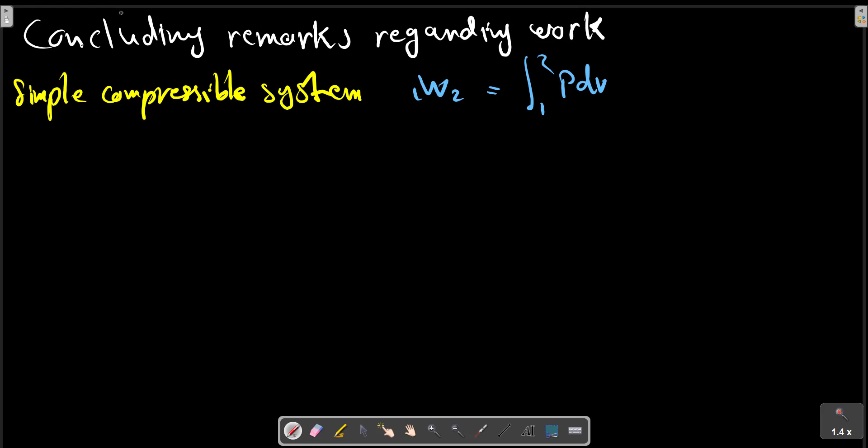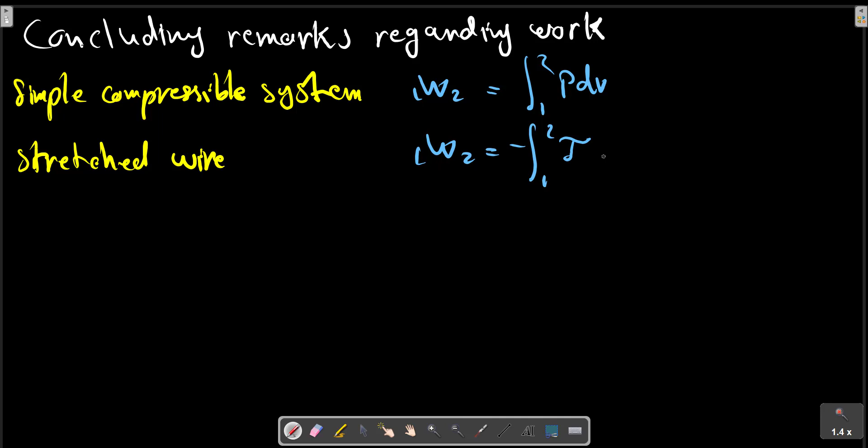Stretched wire, dL. Surface film. System in which the work is completely electrical.

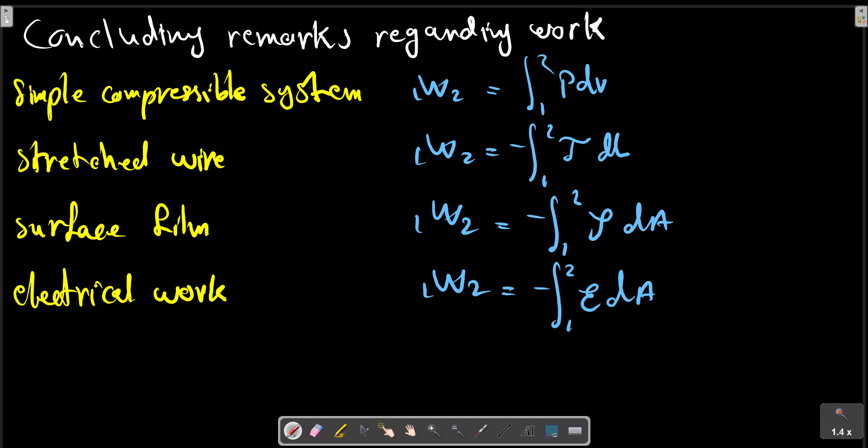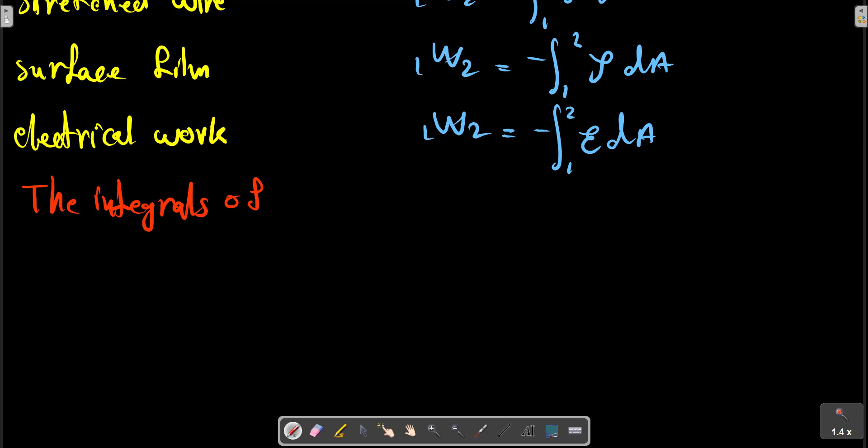dA. In all these programs, we have the integration of an intensive, the integrals of the product of an intensive property and the change of

an extensive property, such as we have extensive, intensive, extensive, intensive.

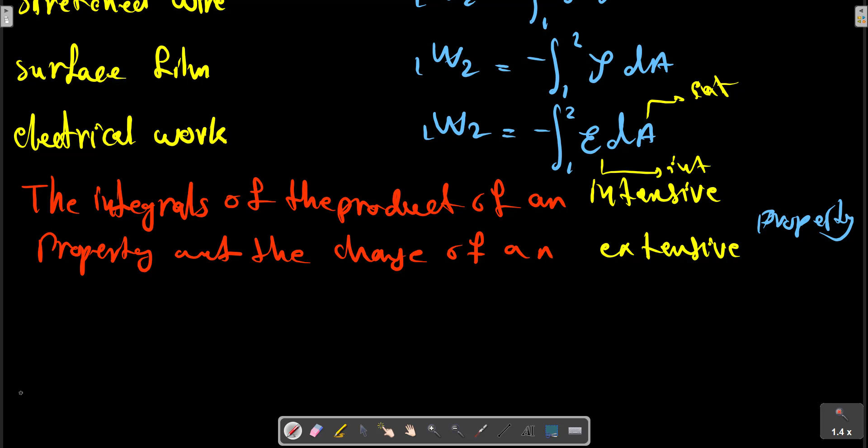Although we will deal primarily with systems in which there is only one mode of work, it is quite possible to have more than one work mode in a given process. Thus, we can write W as a summation of various work: stretched work, surface tension work, and also we can write electrical work, dZ.

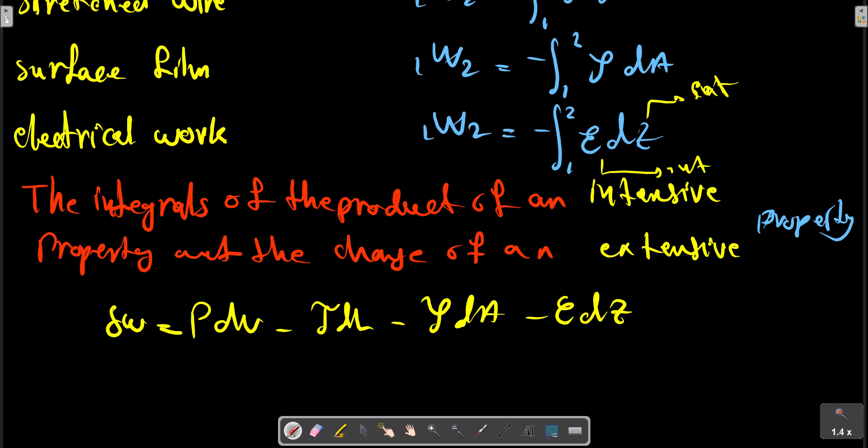Here the dots represent other products of an intensive property and the derivative of a related extensive property, as said before. In each term, the intensive property can be viewed as the driving force that causes a change to occur in the related extensive property, which is often termed the displacement. So we have displacement terms.

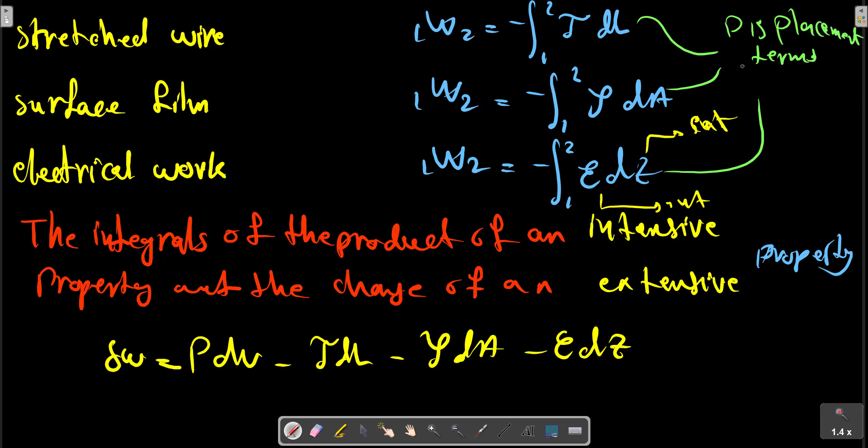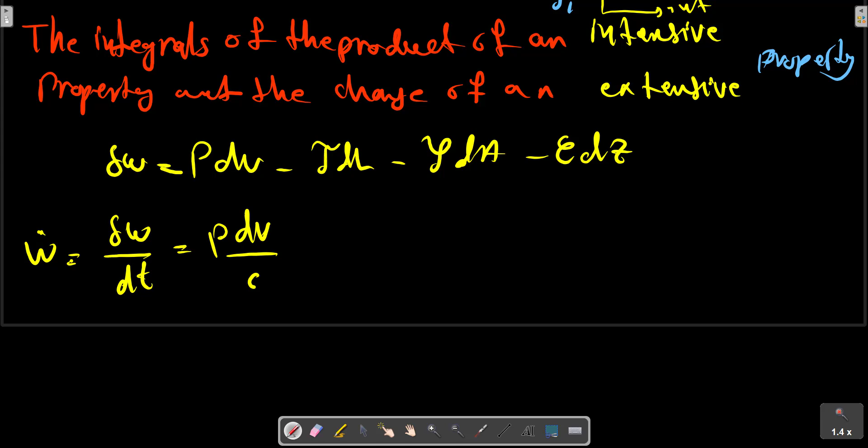Thus, as we can derive the expression for power for a single force, for example, as in this picture, for the power we have dt: P dV/dt, dL/dt, dA/dt and minus dZ/dt.

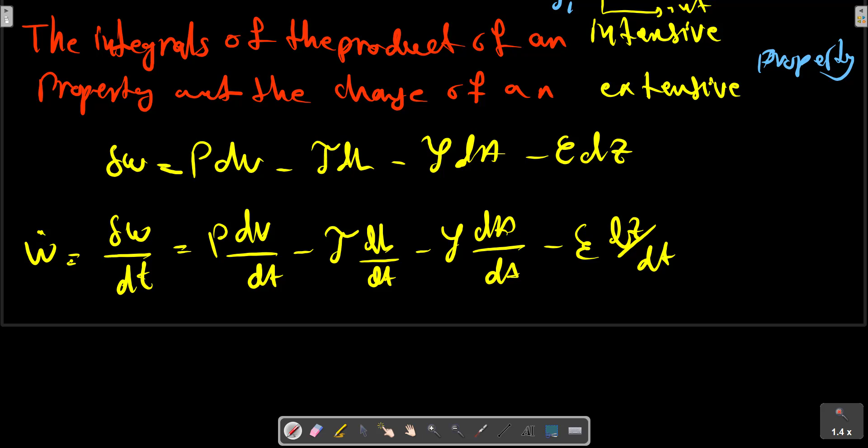It should be noted that many other forms of work can be identified in processes that are not quasi-equilibrium processes. So for non-equilibrium processes, for example, there is the work done by shearing force in the friction in a viscous fluid or work done by a rotating shaft that crosses the system boundary. Force due to friction forces, and force due to the shaft crossing the system boundary.

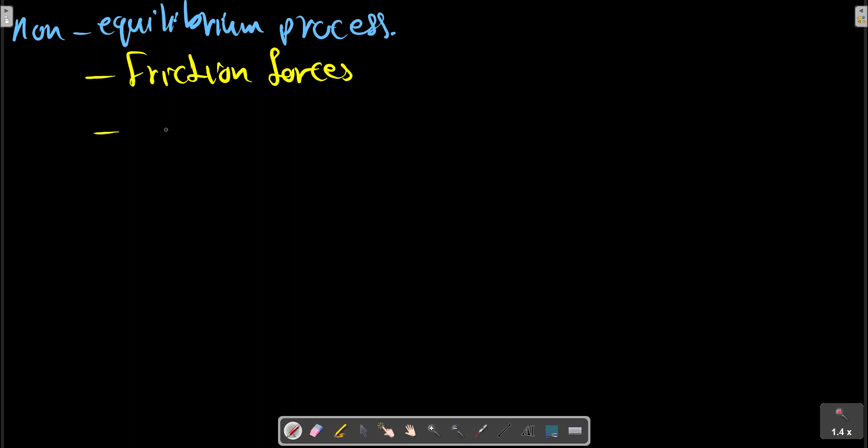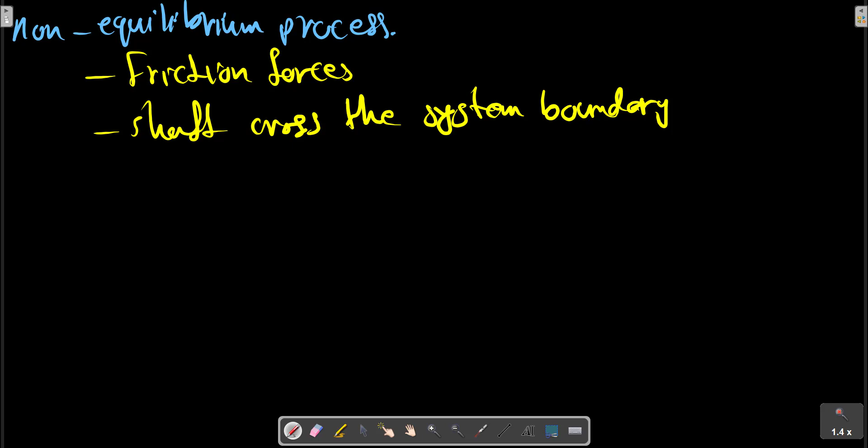The identification of work is an important aspect of many thermodynamic problems. We have already noted that work can be identified only at the boundaries of the system. For example, consider this picture, which shows a gas separated from the vacuum by a membrane. Let the membrane rupture and the gas fill the entire volume.

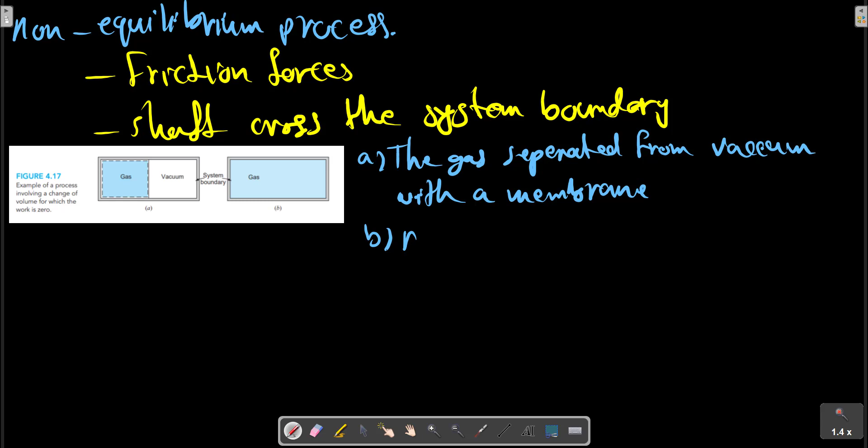At A, the gas separated from vacuum with a membrane. And B, rupturing the membrane. And we can ask whether work is done in the process. Is work done? That is the question. If we take as our system the gas and the vacuum space,

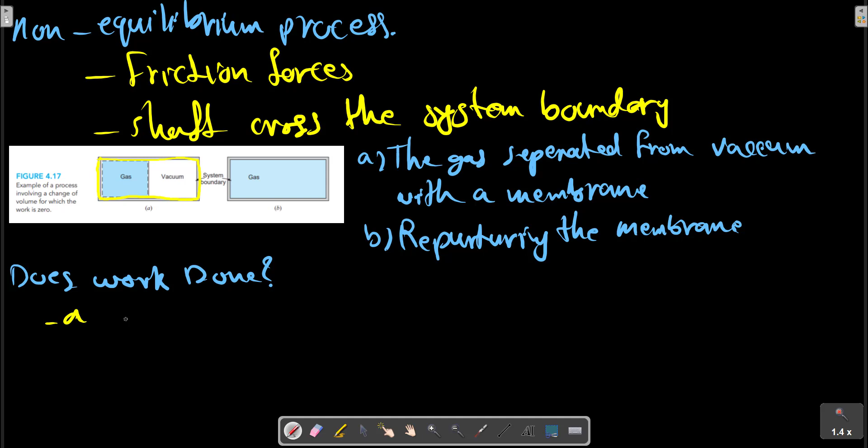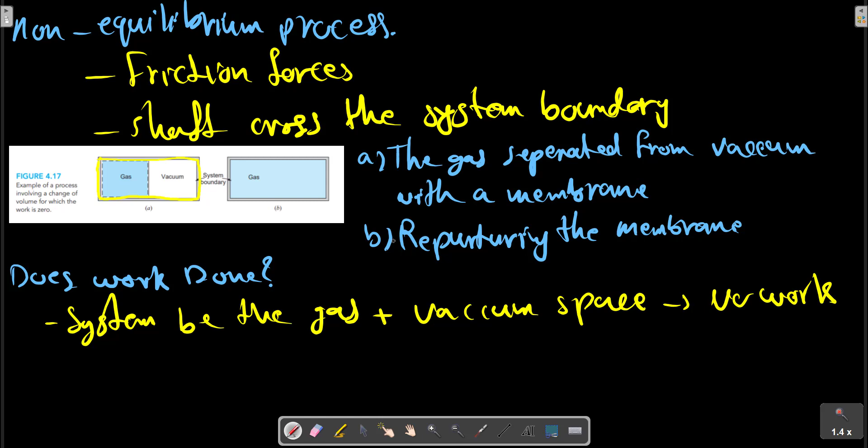at first we have, so if we take our system the gas and the vacuum space, let the system be the gas plus vacuum space. So in this case we have no work because no energy crosses the boundaries.

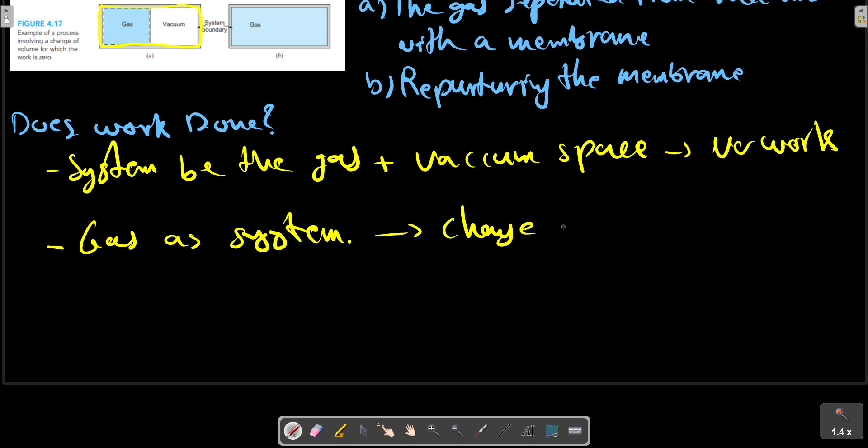But if we consider the gas as the system, we do have change of volume and we may be tempted to calculate the work. So we should calculate the work as PdV. Is it possible? However, this is not possible. It is not a quasi-equilibrium process, and therefore the work cannot be calculated from this relation.

Because there is no resistance at the system boundary as the volume increases, we conclude that for this system no work is done in this process of filling the vacuum. No resistance at the system boundary, so no work occurs in a non-equilibrium process.

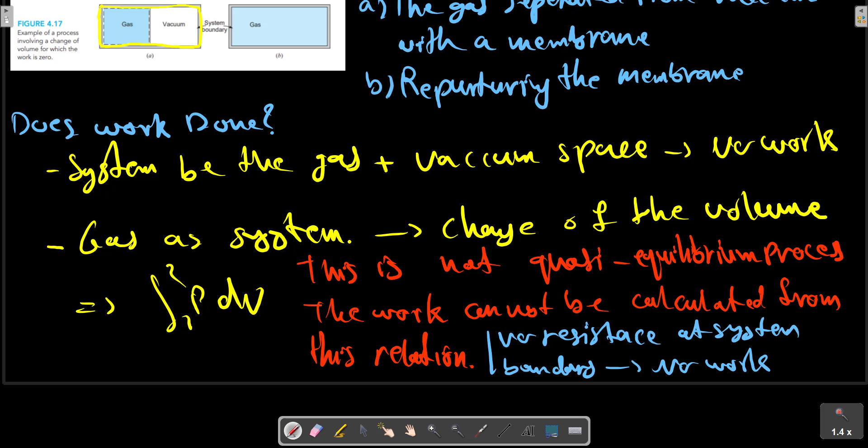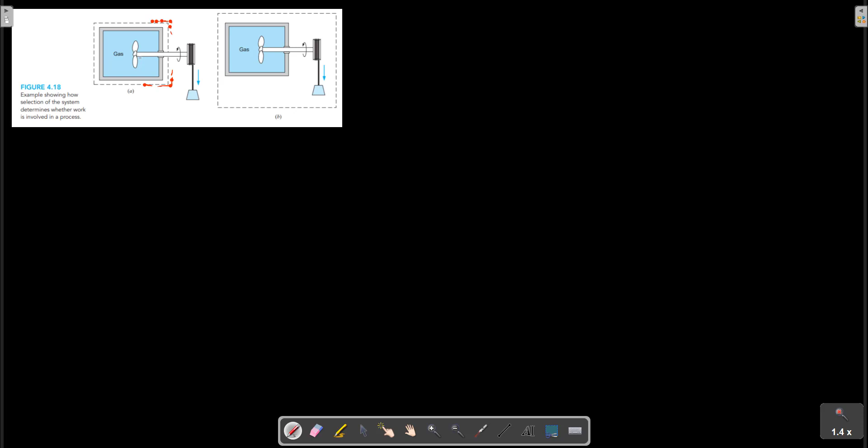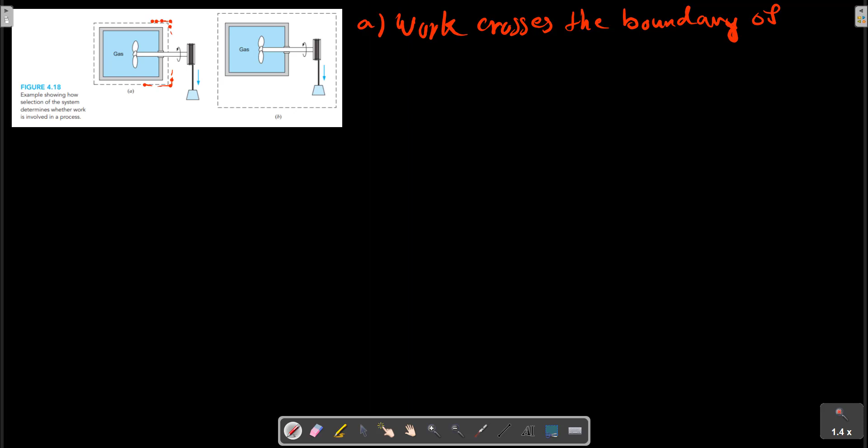Work crosses the boundary of the system at the point where the system boundary intersects the shaft, and this work can be associated with the shearing force in the rotating shaft. In part A, work crosses the boundary of the system at the point where the system boundary intersects the shaft, this point A. And this work can be associated with the shearing force in the rotating shaft.

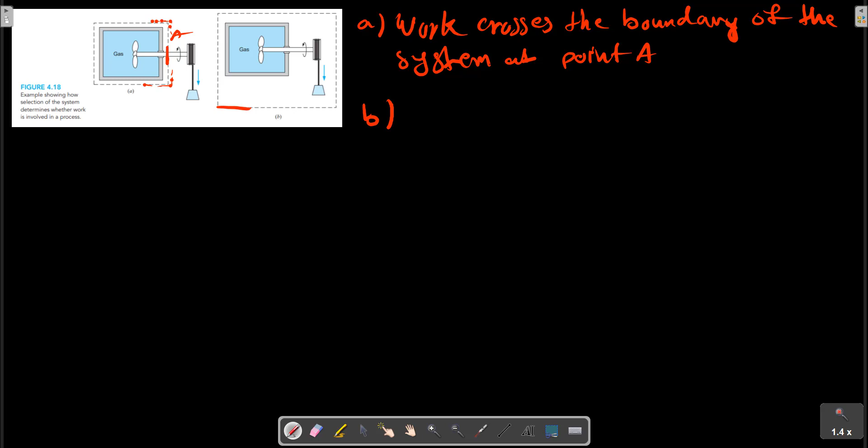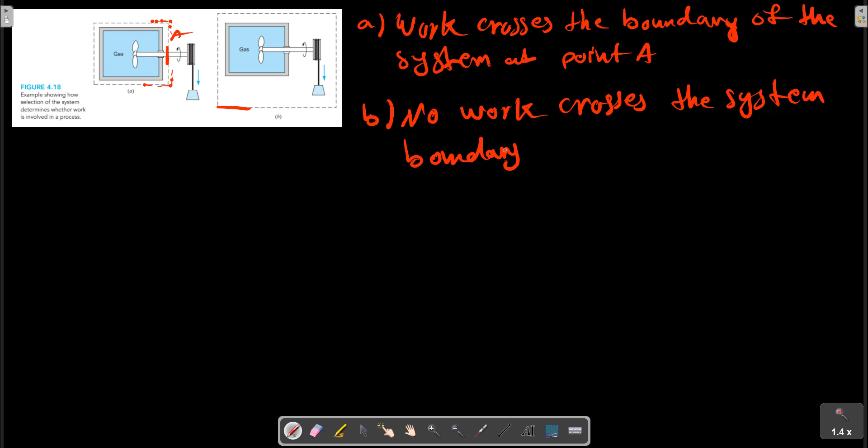In part B, the system encloses the shaft and the weight as well as the gas and the container. Therefore, no work crosses the system boundary. As the weight moves downward, as we will see in the next chapter, we can identify a change of potential energy within the system, but it should not be confused with work crossing the system boundary.

You have potential energy change in the system. We will discuss it in the next chapter. The next section is the definition of heat in the next chapter.